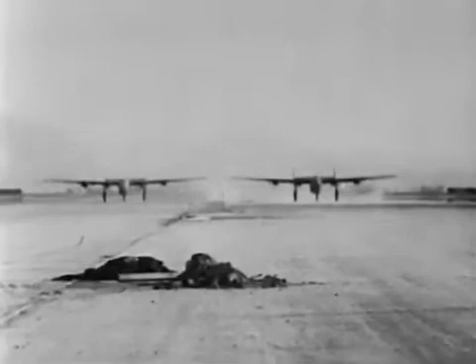A heavy bomber squadron takes off on a long-distance operation against the enemy. Flying with great speed at high altitudes, they avoid detection, drop their loads, and are off for home before enemy fighters and pursuit planes can possibly climb 25, 30,000 feet or even higher. In these cold substratosphere regions of the sky, where the air is so thin it affects engines as well as men, the fastest enemy planes are no match for our B-17s or our B-24s, which return safely to their bases.

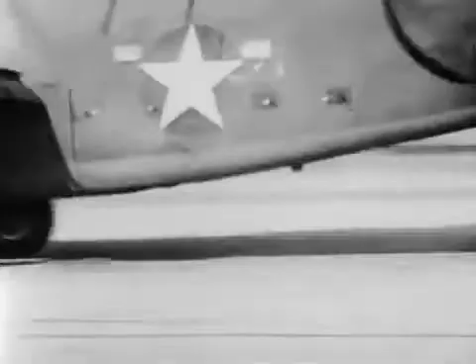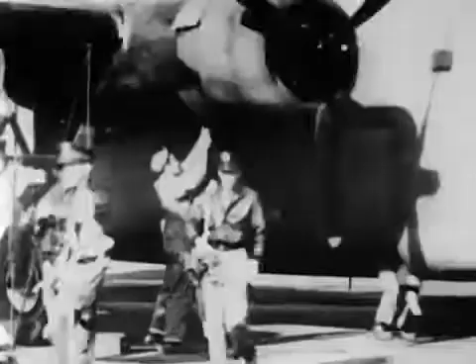Air supremacy is a vital factor, perhaps the deciding factor in this war. The achievement of air supremacy involves speed, personnel, firepower, and maneuverability.

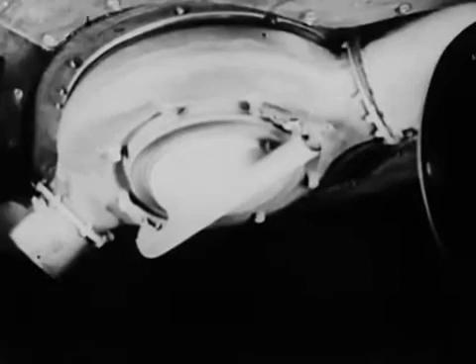But one of the most important factors is the ability to achieve maximum altitude without the loss of power. The Civil War maxim of getting there fastest with the mostest men can be revised in terms of military aviation to getting up higher with the mostest fighting power. This master of the skies, the dynamic turbo supercharger, is the reason for our air superiority at high altitude.

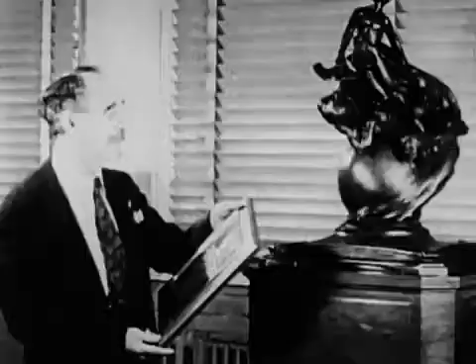For the year 1940, the Collier Trophy, one of the highest honors in aeronautics, was awarded jointly to Dr. Sanford A. Moss and the Army Air Forces for 25 years of collaboration in perfecting the turbo supercharger, which is playing a leading role in sweeping our enemies to defeat.

The turbo supercharger makes possible high-altitude flying with full engine power. An airplane engine derives its power from explosions of a mixture of air and gasoline. At altitudes above sea level, the air gets thinner and thinner. Therefore, these explosions get weaker and weaker.

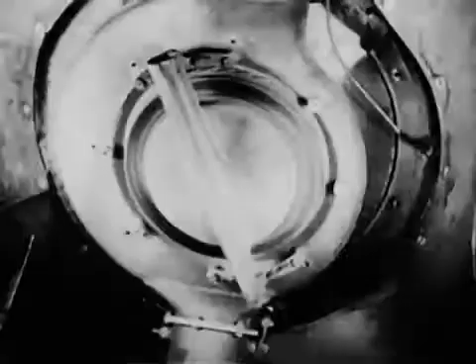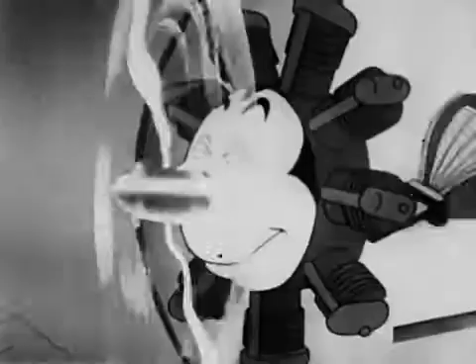At 20,000 feet, an unsupercharged airplane engine gives but one-half its normal power. At 35,000 feet, only a quarter of its power. The turbo supercharger counteracts this loss of power by compressing and cramming air into the engine, thereby maintaining proper manifold pressure to give full power at high altitude. It performs the same service for engines that oxygen equipment performs for pilots, kidding the engine into thinking it is always working at sea level.

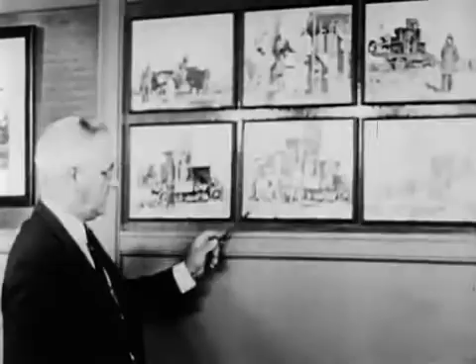Without a turbo supercharger, the engine gasps for breath. During World War I, the first model turbo supercharger was tested under great difficulty, on a truck at the summit of Pikes Peak, 14,100 feet above sea level.

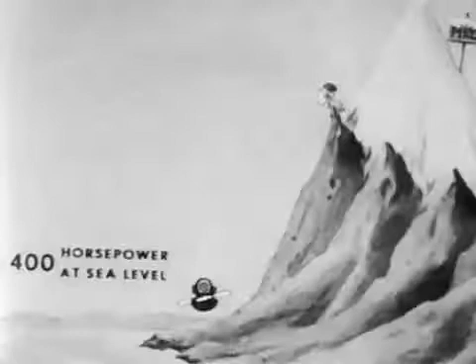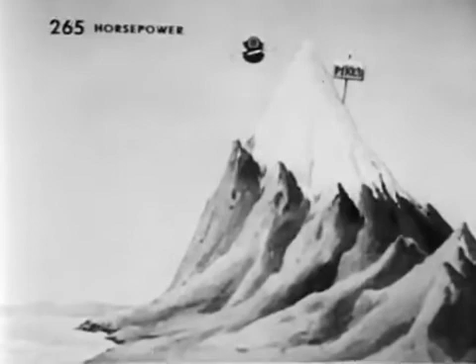The Liberty engine developed 400 horsepower at sea level, but moving up to 14,000 feet, it dropped to 265 horsepower. Then the turbo supercharger not only boosted it up to 400 horsepower, but to 410, or 10 more than normal at sea level.

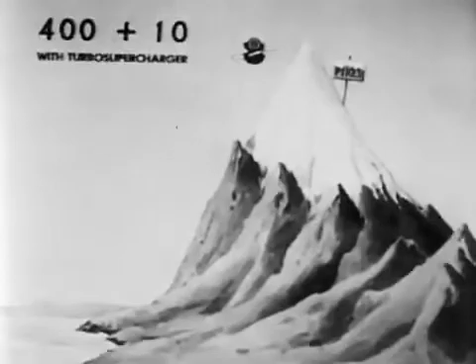The turbo supercharger has demonstrated its worth in actual combat all over the globe. Our great bombers, the Boeing B-17 Flying Fortress and Consolidated B-24 Liberator, together with the Lockheed P-38 Lightning, the P-43 Lancer, and the deadly Republic P-47 Thunderbolt, are all turbo supercharger equipped, which enables them to fly and fight effectively at great heights above the earth.

Our turbo supercharged interceptors and pursuits can get on top and stay on top of anything the enemy has to offer. These tactical advantages are the key to air supremacy and ultimate victory.

Turbo superchargers permit our bomber pilots to avoid bad weather, even storms, by climbing over them, making it possible to fly at altitudes and speeds which result in maximum engine efficiency.

Obviously, we have a decided edge when we can bomb the enemy with a minimum of danger to our planes and personnel. Flying turbo supercharged planes, our boys have bombed enemy objectives with amazing accuracy from heights where they were invisible and unheard from the ground. There had been no warning sirens, no opportunity to take shelter, only the sudden scream and paralyzing crash of bombs falling out of a clear sky.

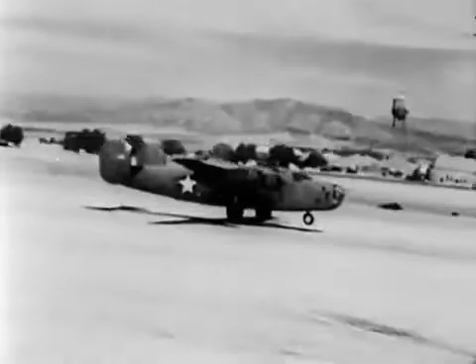Almost without exception, these planes have returned safely from their mission. Time after time, you have read of our big bombers returning unscratched from perilous raids in all theaters of the war. It is true that our heavy bombers have been in dogfights and have suffered casualties in men and planes, but in practically every instance, this has happened when planes were operating at levels below 25,000 feet.

Another reason we have to get up higher and higher is to get above the effective range of anti-aircraft fire, which has been reported even above 30,000 feet.

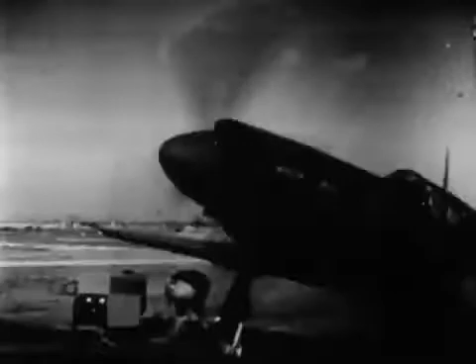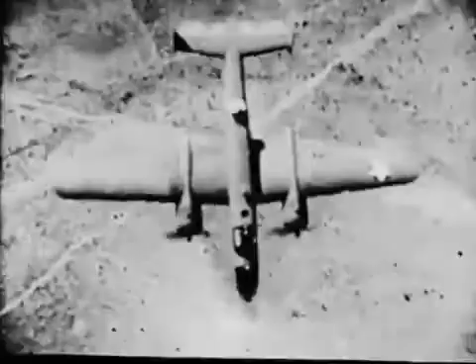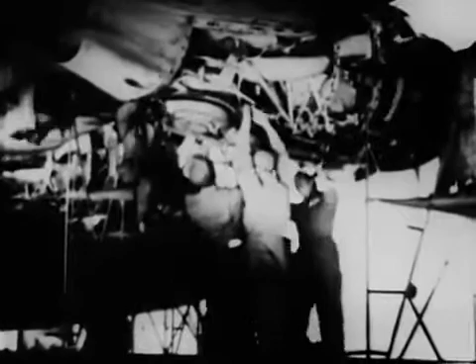All combat planes are equipped with gear-driven superchargers, which are built into the engines and driven from the engine crankshaft. These geared superchargers are effective up to medium altitude. At high altitude, the turbo supercharger is needed to provide additional pressure to maintain full engine power. With proper care in installation, maintenance, and operation, the turbo supercharger is extremely effective, reaching its full power and efficiency at 25,000 feet or higher.

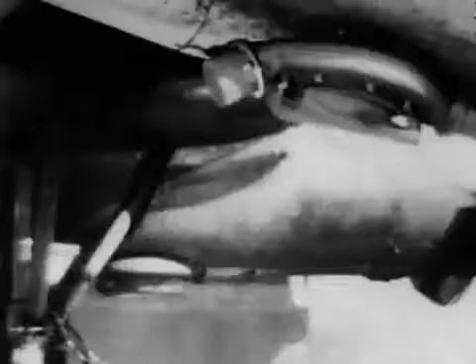This is the turbo supercharger installation in the B-17. Installations vary according to the different types of ships, such as the B-24, the P-38, the P-43, and the P-47, where it is submerged in the fuselage.

A turbo supercharger is driven by the terrific impulse of hot exhaust gases from the engine. It largely uses waste power.

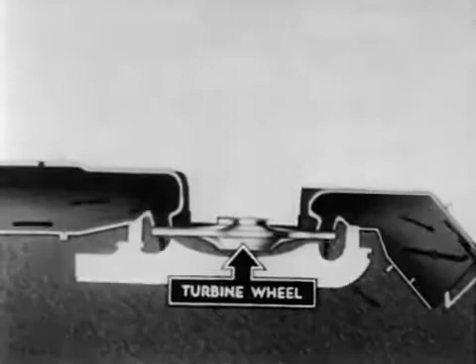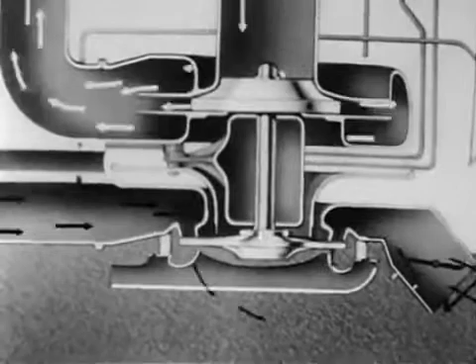Waste exhaust gases pour into the nozzle box, where they are directed onto a metal windmill or turbine wheel at 1,500 degrees Fahrenheit, with all the red-hot energy that implies. This blazing force spins the turbine wheel at terrific speeds, up to about 20,000 revolutions per minute. The turbo supercharger stands the gaff of almost impossible high-speed strains and stresses, and still performs its task at temperatures ranging from 1,500 degrees above to about 67 degrees below zero Fahrenheit.

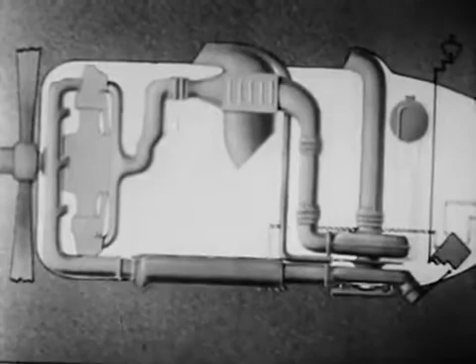The basic principle of all turbo supercharger installations is outlined in this diagrammatic drawing. Flexible joints are installed between the component parts to absorb vibration. For purposes of clarity, we will divide the system into 5 parts.

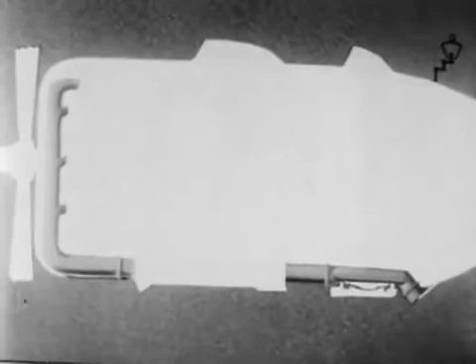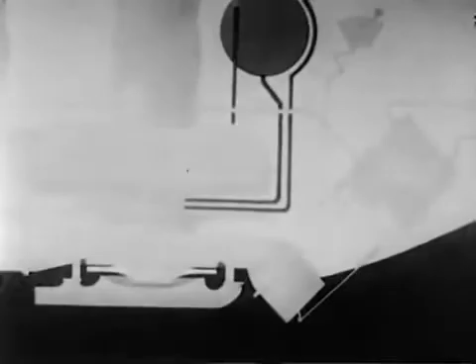1, the induction system. 2, the exhaust system. 3, the ventilating or cooling system. 4, the control system. And 5, the lubrication system. Individual installations vary according to the different design of ships, but their functions remain the same.

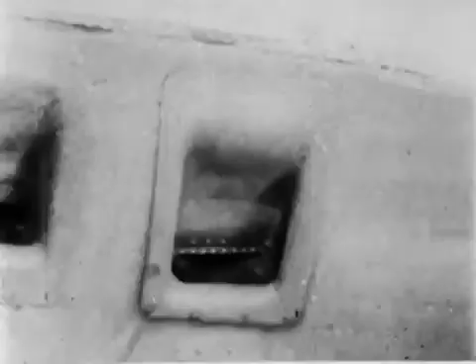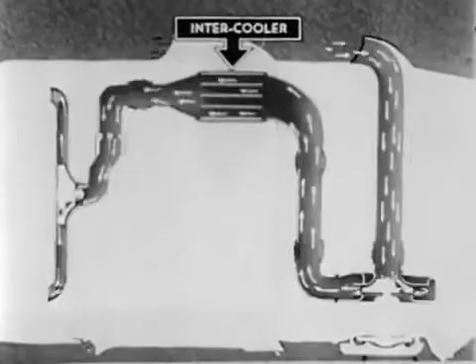The induction system comprises rammed air intake in the engine nacelle or in the leading edge of the wing. The speed of the plane rams air into these intakes and assists in keeping up pressure. Ducts carry this air to the compressor, where it is compressed and forced through the intercooler, and the carburetor to the inlet of the geared supercharger.

The geared supercharger is used to do part of the required supercharging and to improve the distribution of the fuel charge to the cylinders.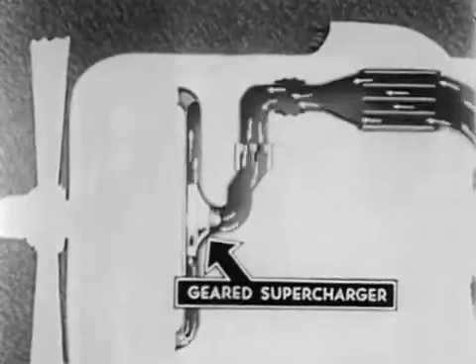The exhaust system takes the high-temperature exhaust gases from the engine to turbine wheels, or out through the wastegate to the atmosphere. The cooling or ventilating system cools the supercharger parts, thus preventing damage due to the high-temperature exhaust gas.

Rammed air is carried through ducts to the turbo, where the stream is split by the baffle plate and cool air forced against the bearing housing, compressor casing, the back of the turbine nozzle box, and the back of the turbine wheel. Other ducts perform the same functions in relation to the exhaust stack shroud, which insulates the exhaust stack,

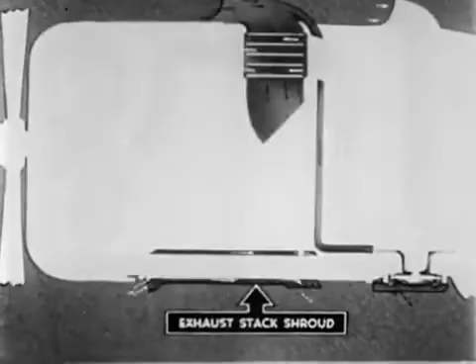and the air intercooler, which for proper combustion reduces the temperature of the air fed from the compressor to the engine. The intercooler cools air in the same way the radiator on your car cools water.

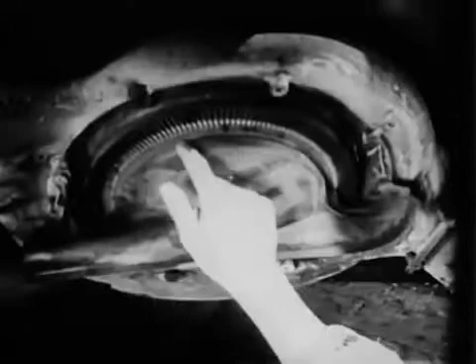The cooling cap supplies air to the rim of the turbine wheel to lower temperature of the wheel disc.

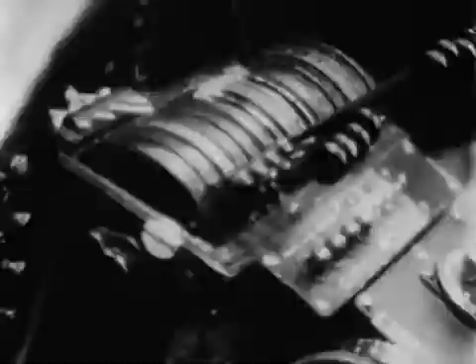The turbo supercharger is controlled by a hydraulic regulator, which operates the wastegate in response to pressure changes in the exhaust stack. The wastegate control is adjusted by a boost lever in the cockpit.

The wastegate controls speed of the supercharger by bypassing the gases around the wheel. With the wastegate open, the turbine will idle. Closing it by degrees enables the turbo supercharger to operate at required speed.

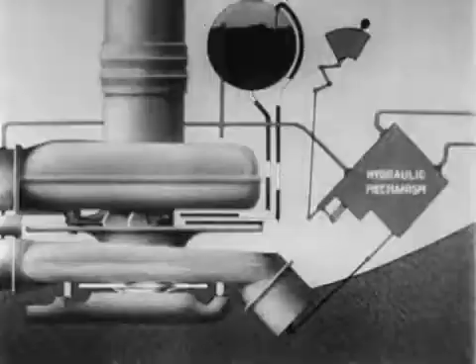Lubrication is accomplished by a gear-driven pump. One element of the pump takes oil from the tank and supplies it under pressure to the moving parts. The second, or scavenging element, returns the oil to the tank.

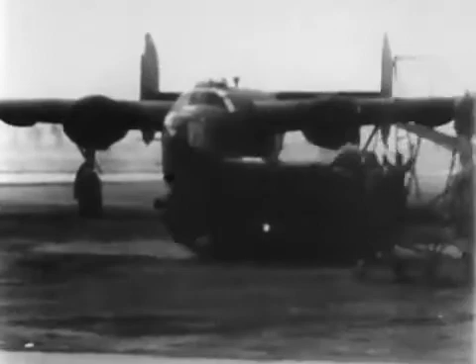When a ship comes in from a long, grueling flight, or even a routine operation, the pilot knows that the ground crew will assure the success of his next mission by a thorough inspection.